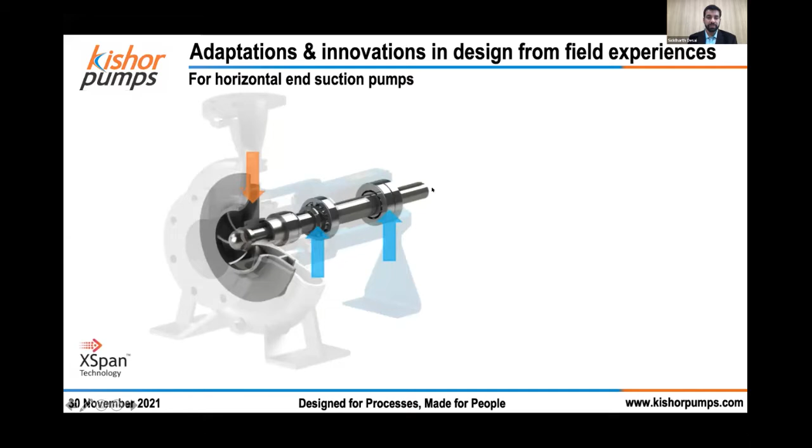Now, in classical mechanics, what we learn is that the portion between these two bearings is what we call a simply supported structure, and the portion of the shaft beyond this is what is called the overhang or the cantilever portion. Now, I'll try to focus on the drive assembly only and make the other static parts more transparent. So when a pump is running, the pump is generating the pressure and discharging the liquid from the casing at the top.

There is a force, what is called the radial thrust. I'll come to what radial thrust is in a bit, but the radial thrust acts on the pump in a direction perpendicular to the shaft assembly, and at the same time it is supported by the bearing. So the orange bar is the force generated by operation of the pump, and the blue arrows are the reaction to that force provided by the bearings to the shaft.

So radial thrust is the force resulting from the pump delivering the liquid through the discharge bore, that is from the top here, and it is a function of the pressure at which the pump is operating multiplied by the annular area of the impeller between the two shrouds. So pressure multiplied by area, that is force. Pressure is what the pump is operating at, and the area is the annular area between the two shrouds. So that is the radial thrust, and it acts perpendicular to the axis of rotation of the pump. That is why it is called radial.

Now the pump end bearing here is supposed to take the radial thrust. This primarily takes the radial thrust. These bearings are designed to take other types of forces. And as I mentioned, in horizontal end suction pumps, this is where the force has its primary effect, on the overhang or cantilever portion.

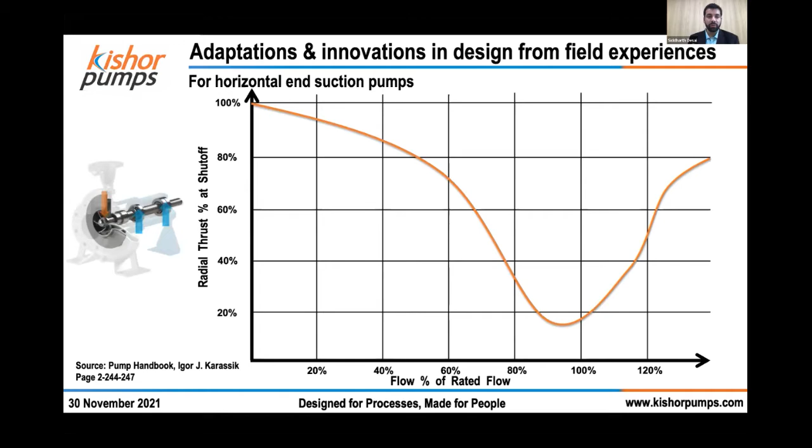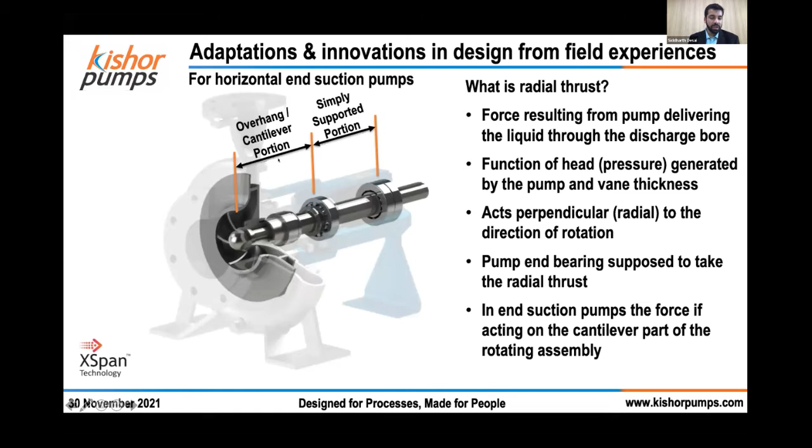How the effect of radial thrust can be reduced on the pump assembly to increase the reliability and reduce downtime is the main focus of this particular adaptation or this innovation. So as I mentioned earlier, this is the simply supported portion of the shaft, and this is the cantilever or the overhang portion of the shaft.

Now, the effect of the radial thrust on the pump operation is that it leads to a deflection of the shaft, leading to mechanical seal wear and tear. As this orange arrow forces down that impeller, it leads to deflection on the shaft, which leads to deflection on the mechanical seal, and it leads to vibrations, and also the efficiency of this pump might be reduced. So these are the effects of the radial thrust on the pump.

Now, what all manufacturers try to work on is how we can reduce the effect or the impact of this radial thrust on the pump. As I said, we cannot reduce the radial thrust completely, but we can reduce its impact on the pump. So one way to combat it is to design a volute or a casing with what is called the double volute. There are two separate flow paths inside the casing, which neutralize the effect of the radial thrust on the pump.

But this particular approach is typically used for bigger size pumps. When I say bigger size, when the discharge bore is, let's say, more than 80 or 100, and especially typically more than 150 millimeter diameter, because for smaller pumps it is costly to do that. And in smaller pumps, it will eat up a lot of the efficiency.

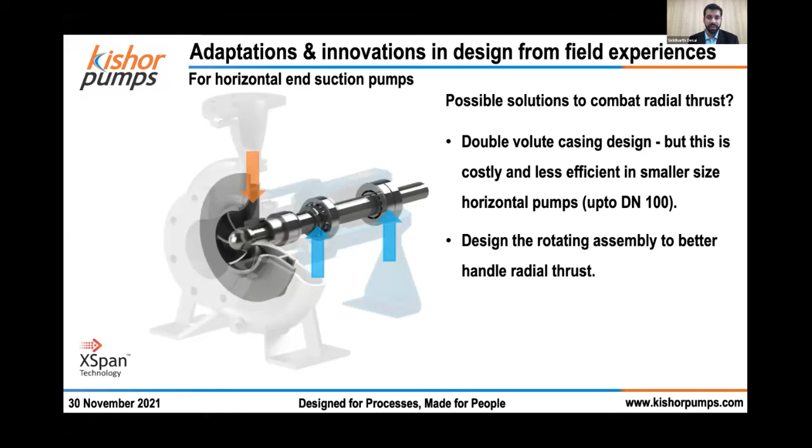For large pumps, the cost increase is relatively less, and the efficiency loss is also relatively less. So that's why larger pumps can adopt the design of using a double volute casing. The second approach is designing the rotating assembly, this particular solid assembly you see right now, to better handle the radial thrust.

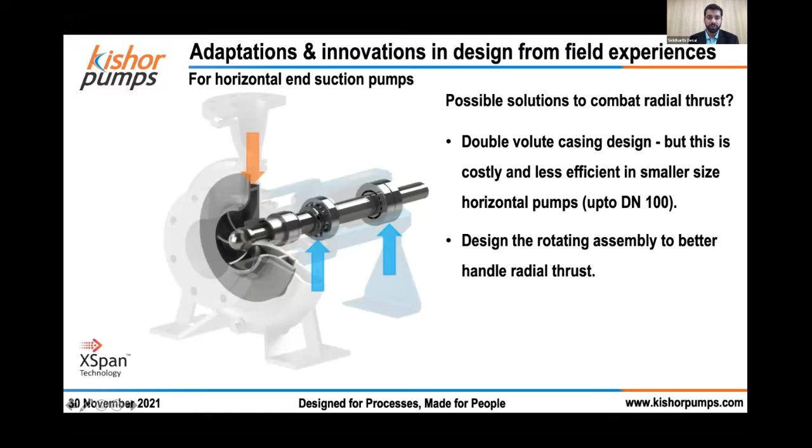So how it can be done is, sorry, I'm just switching the slides here. You can see the position and location of that front pump bearing. So by moving the bearing a little bit towards the impeller, we can reduce the length of the overhang of this pump. And this will lead to reduced impact because it will reduce the bending moment at the bearing.

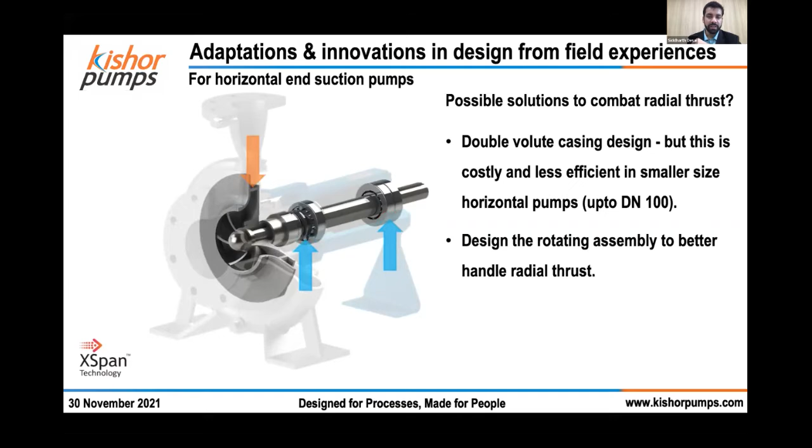Bending moment is a function of the force multiplied by the distance, that's the cantilever distance. So this length from the bearing to the end of the impeller is reduced by changing the location of this bearing, and this leads to reduced deflection on the shaft because the bending moment is reduced. So this is one way we can combat the ill effects of the radial thrust on the horizontal end suction pump. This is an adaptation from field experiences that pump manufacturers have considered.

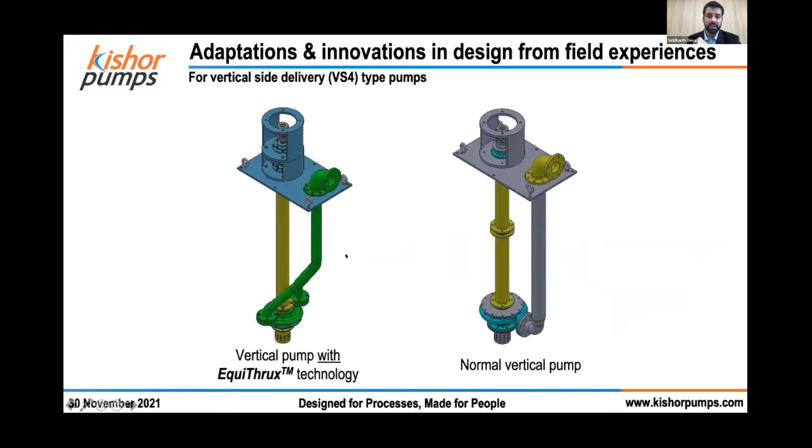The second example I would like to cover now is regarding the vertical pumps, typically referred to as VS4 type pumps. What you see on the right hand side is the typical VS4 pump, which is used very commonly in many applications. And the left hand side is a modified design based on site applications.

radial thrust. Now you can imagine in vertical pumps, where majority of the support or the bearing fixture is coming from the top, there is a long shaft assembly, which leads to a more magnified impact of the radial thrust on the bearing, on the impeller and the shaft. Because the distance between the supports is much longer in vertical type of pumps. So the impact of radial thrust on vertical pumps is much worse than in horizontal end suction pumps, what we

saw earlier. So especially in vertical pumps, it is very important to reduce or minimize the impact of this radial thrust on the pump to increase the reliability of the pump. Because for vertical pumps, the downtime is very expensive considering the procedure for maintenance. For all manufacturers, the objective is to reduce the downtime of vertical pumps.

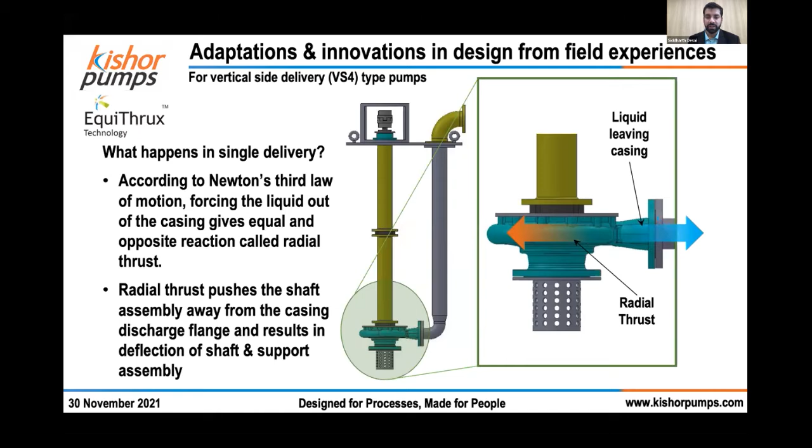Now, to do this, there are approaches by which we can have the volute or the casing designed in a way that discharges an equal amount of liquid at the same pressure, but in opposite direction, that is 180 degrees apart. So it balances out the imbalanced radial thrust. So what I call imbalanced radial thrust is this. This is only in one direction, the orange arrow.

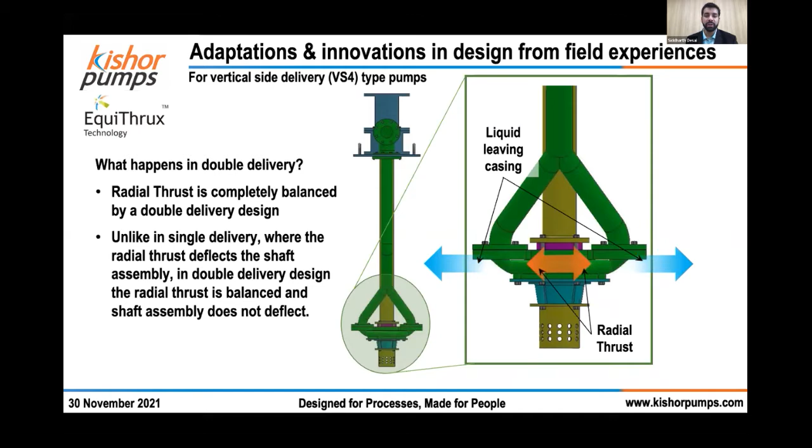Whereas with this particular design, we can balance out the imbalanced radial thrust, and this also leads to minimal, if not fully zero, deflection on the shaft. And that is our objective. By minimizing the deflection on the shaft, the intermediate bearings can be well protected and the downtime can be reduced further. So this is the second innovation or adaptation that we have done.

This is just an illustration of the radial thrust with different types of volutes. So the blue line that you see is what we also saw earlier in the end suction pumps design. That is what we call the single volute, wherein the radial thrust is very high at shutoff. It reduces, and near the best efficiency point or the duty point of the pump, it is very low, and then again increases as the valve is opened further.

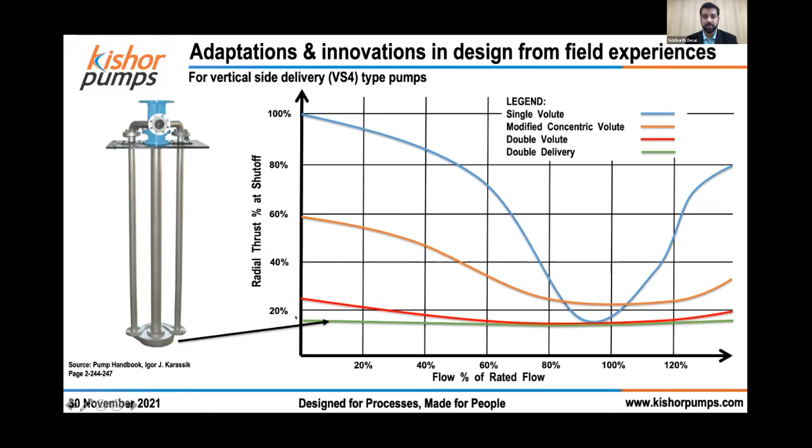Now, what are the advantages of this? It leads to balanced hydraulics for trouble-free operation. Longer shaft lengths with less intermediate supports are possible. Typically vertical pumps of more than 1.2 or 1.5 meters in length require intermediate supports. Now with this adaptation, we can go up to 2.5 meters without any intermediate support. So the cost of the pump is reduced and the maintenance requirements are also reduced.

Then in some applications where external flushing is required, that won't be required in this case. More importantly, this type of adaptation offers the flexibility to operate that pump at a very wide range. As I mentioned earlier, most manufacturers restrict the range of operation within 40 to 120% of the best efficiency point or the duty point, or 60% to 120%. So this particular modification can allow a wider range of operation of the pump. So it's beneficial from the user's perspective that it can accommodate a wider range of flow depending on what kind of application is there.

Even if the possibility is less, even if there is a dry run of the pump, that won't be a problem for this kind of modification, because even if the pump runs dry, provided it is a cantilever pump that does not have intermediate supports, it does not lead to any damage to the pump, and obviously fewer spares are needed for this kind of design.

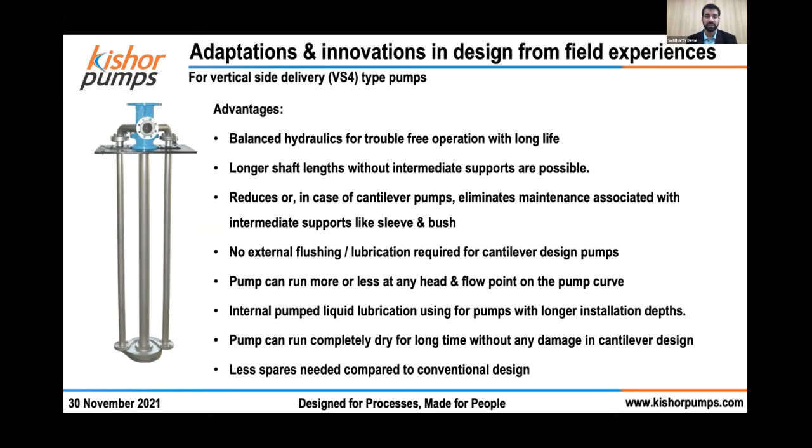Then as we go from the preliminary treatment to the primary treatment, that is the settling tanks, the primary clarifiers, a lot of the large solids are settled and taken out. And then in the sludge pumps, that is the aeration basins, the solid size can now be controlled roughly around 40 to 50 millimeters. And then after the secondary treatment, which is aeration and the secondary clarifier, it is as good as clear water. So then the solids requirement is almost close to zero or nil.

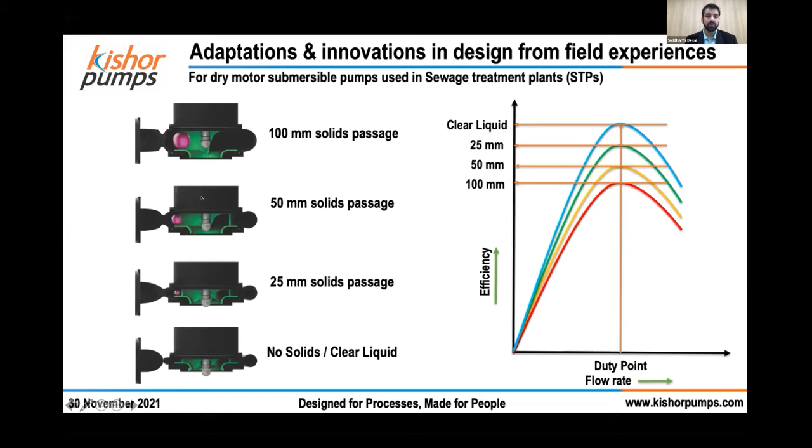So it is important to understand the type of solid. Manufacturers have recognized, based on their field experiences, that you do not need a 100 millimeter solid handling pump in the sludge basin or at the discharge side of the STP, and many pump manufacturers are now offering pumps with solid sizes suitable for a particular location within a plant. This is something that was not available earlier when the STP concept started in India. But now manufacturers are aware that you do not need a 100 millimeter solid size pump for the sludge basins or the aeration basins, as well as on the treated water discharge side.

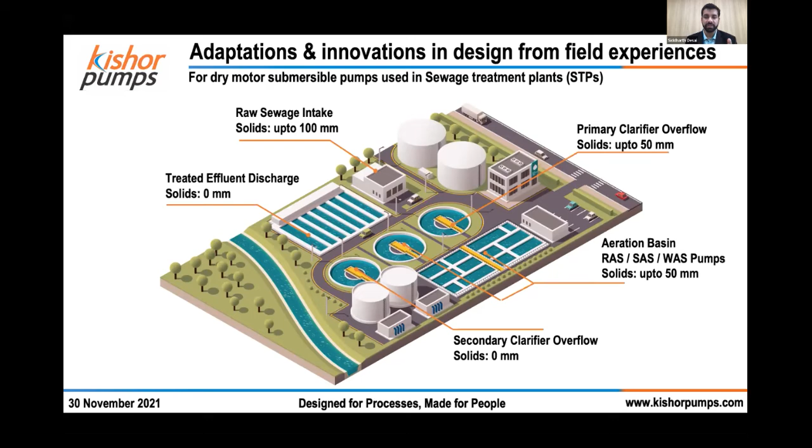And the last point I want to focus on is the design modifications based on site learnings in terms of maintenance requirements. As Mr. Vadhwane mentioned during the panel, the availability of trained and skilled manpower at sites is reducing day by day. So the manufacturers have to learn and adapt from that and offer designs which reduce not only the maintenance requirements, but also simplify the way the pumps are to be maintained or repaired. We have to recognize that the pump should be able to be maintained or repaired with the minimum skill set, minimum trained manpower, and minimum possible tools or tackles available at site.

So we cannot expect all the fixtures and facilities and tools and tackles to be available at site that we have in our factory during the manufacturing stage. So recognizing that, a lot of manufacturers have adopted designing the pumps in a way that makes it easier to do the maintenance and the repair procedures at site with minimum possible tools, and specifically no special tools should be required at site. So these are the learnings from site that we can incorporate in the pump design.

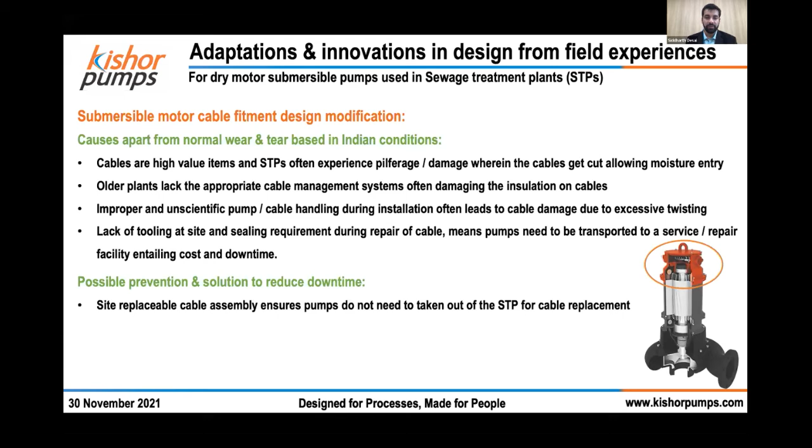What you see on your screen right now is a specific application for submersible pumps, wherein the cable is a special part of the submersible pump. Typically cables are fitted or repaired in the workshops or in the factories itself, and rarely at sites. But there are now designs available wherein the cables can be installed at site without having the pump sent to the service center or the workshop or the factory.

So we can design pumps with a completely isolated or junction box kind of design, an isolated chamber inside the submersible pump, wherein the cable can be repaired outside, and while doing the repair of the cable, the electrical parts of the motor are not exposed. So there is no damage to the motor while the cable is being repaired or replaced.

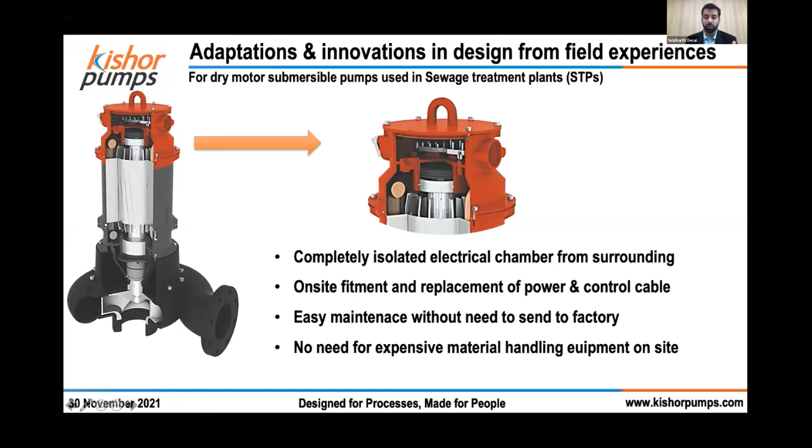So these are the 4 or 5 adaptations that I mentioned, which a lot of manufacturers have adopted and learned from, and that is benefiting users. So I hope I have been able to communicate some of the learnings that we, as well as many manufacturers, have learned over time on site, and then used in the design modifications of the pumps.

Thank you. So Siddharth, we have a few questions that have come up for you. Abhijit Rai Chaudhary is asking: is the nature of the radial thrust chart the same for pumps with continuously rising curves and pumps with drooping curves also?